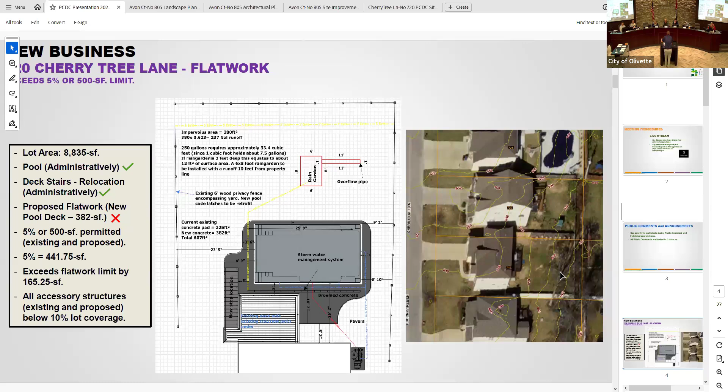Jack, are there any known water related issues on this property or the surrounding area? My understanding is it kind of falls - if we look at the photo on the screen, and also on page 3 of the report, it shows the contours there, and that shows it gradually slopes west to east. And then there's kind of this little ravine, or I don't want to call it a ditch, but drainage.

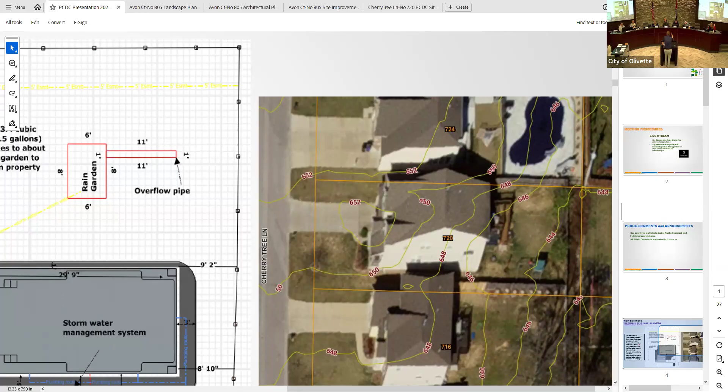That kind of goes right down in between those two properties, between Cherry Tree and the street located to the east between those properties. That falls - if we had the bigger picture of the contour, you can see how it gradually goes down following the natural grading. So not that I know of. I don't know, Carlos, have you? Okay. Sweet, thank you.

This is an area that developed right away, right before 2008, before the city had on-site stormwater detention requirements for those lots. So we experienced quite a bit of increase in stormwater because of the new homes and driveways there, and as people settled in, improvements went in place.

The way it's set up is that there's a piping system along Cherry Tree and Harvest that releases the front yards down by the creek that runs in the St. Louis County right-of-way and the bike trail. That's been the natural flow of drainage, with the rear properties all draining right along that middle area.

You can see how the fences are kind of all separated apart, and the drainage just flows all the way through in there. Some days it's stagnant when it's light and low, but for heavy rains, that's the direction most of that drainage goes, heading down towards the bike trail and then into the stream that runs east-west towards University City.

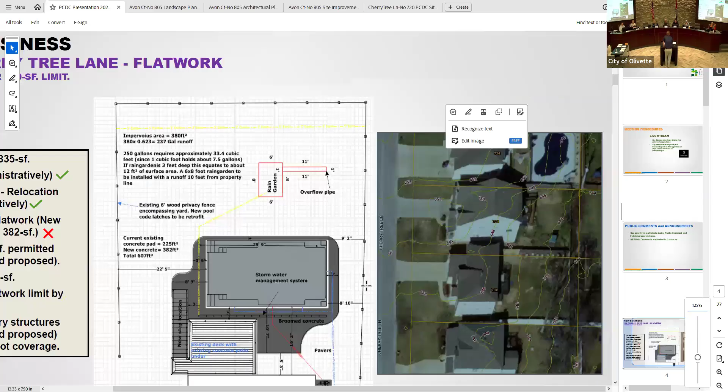Anybody else have any questions or comments for Jack? I'd also like to note that the notifications were mailed out and we've gotten no concerns back from any of the surrounding neighbors. And to reiterate with the accessory structures, there's a portion of code that gets checked with the 10% lot coverage. They are below that threshold, so they don't exceed the 10% of existing and proposed on their lot, but they do exceed the 5% flat work.

Appreciate the clarification. And the homeowner is here tonight if there are any additional questions. If you'd like to come up—do we need the homeowner to come up? Does anybody have any questions or comments for the homeowner? Seeing none, do I hear a petition?

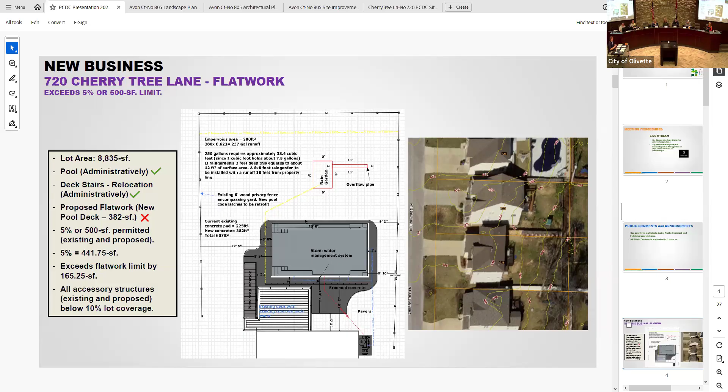I'll make a motion. Go ahead, Sam. Motion to authorize approval of the petition for site plan and community design review for a total of 382 square feet of new rear yard flat work at 720 Cherry Tree Lane, as presented in the memorandum from the Department of Community Development dated December 18th, 2025, subject to any staff conditions noted therein.

Motion's been made by Sam Wallach. Do I hear a second? Second, seconded by Laura Ragsdale. Carlos, please call the vote. Commissioner Spiegelglass, approved. Commissioner Ragsdale, approved. Commissioner Wallach, approved. Chairman Jorgel, approved. The motion is approved unanimously.

So the next step is completing the building permit process to get the necessary permits. Jack will coordinate that with you. Thank you, thank you.

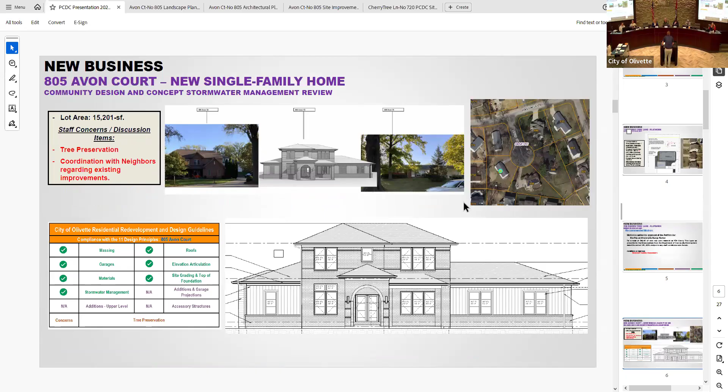Okay, we'll move on to item B, 805 Avon Court. Jack? Good evening again, Commission. So before you tonight is 805 Avon Court. It's a new single-family home that's only subject to community design and concept stormwater management review due to the sizing of the lot. The main concerns from staff came up with tree preservation and coordination with the neighbors regarding existing improvements.

If we go to this graphic, you can see it depicts the other properties that are around or within the same cul-de-sac. There are two homes that are relatively new, one built in 2009 and one built in 2007. 800 Avon is the farthest to the south, and then I don't know, I can't read that number.

808 Avon is also one of the newer builds. You can see that 809, and then 804, are the ones that are older, the one-stories, but they also provide the residential square footage there.

If Carlos, you could go back - there were no concerns with the stormwater. That's just a graphic depicting the location of the PVCs, the metering outflows, and the detention facility that will be located to the south within the rear of the lot.

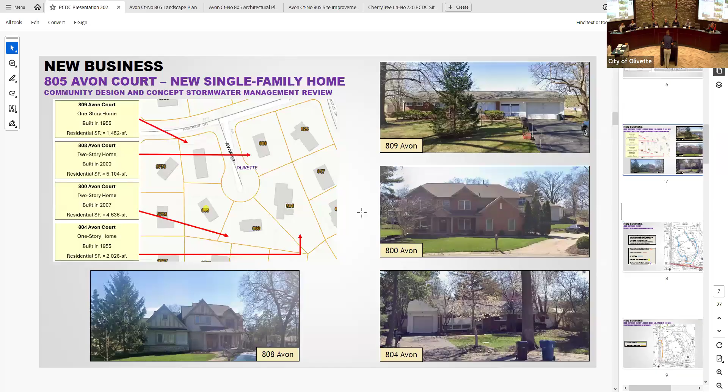Carlos, if you could go to the next slide. This is one of the concerns that stuck out to staff, the location of the neighboring improvements. The site plan depicted a 48-inch chain link fence to the north that comes off the property to the north and extends onto 805 Avon's property, as well as a garden area noted there. We're seeking clarification on whether that garden area is part of 805 or if that's something the neighbor on the lot to the west extended onto 805's property.

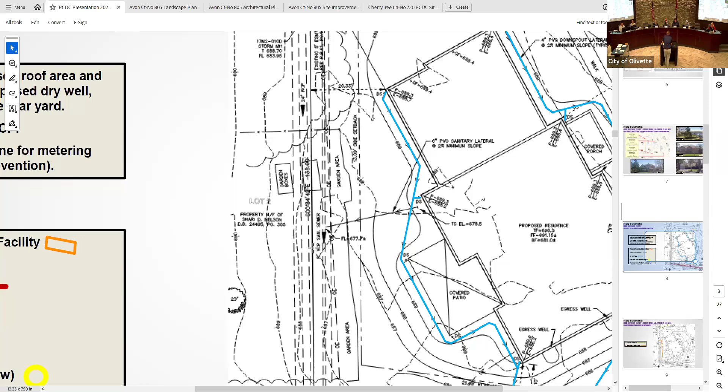So we're seeking for the petitioner to coordinate with those neighbors to have those improvements addressed. In the conditions of approval, since it's a lot that's being remodeled and renovated as a tear-down build, it's going to be something that as our condition of approval, those on-site improvements would be required to be removed.

The other concern that stuck out was tree preservation. There is just one tree deemed on the lot and it's deemed in good condition, located in the northwest of the property. We're seeking additional information on the tree protection measures.

It's planned to be protected. However, we want the petitioner to go back and make sure that everything submitted for the building permit is in accordance with ordinance 2821, to make sure the construction fencing differentiates from the tree protection fencing, and that the correct distancing is applied from the plans, making sure what's shown on the demo plan matches what's shown on the site plan and landscape or tree replacement protection plan.

We just got an additional landscape plan, and that plan depicts 2 replacement trees, though there's more than 2 shown, with 2 of them deemed native trees. For a lot between 15,000 and 20,000 square feet, 6 replacement trees would be required. He's protecting 1, providing 2. We would like to see that plan updated to reflect the 3 additional trees that are supposed to be indicated under the ordinance.

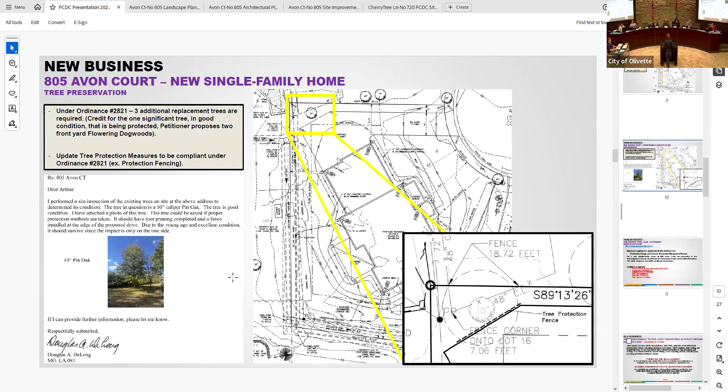All right, great. Does anybody have any questions or comments for the representative? Seeing none, thank you. I appreciate it, thank you.

All right, any other further discussion? I'm sorry, did we want to talk about the garden or anything like that? We can, yeah. Have you talked to the neighbors about the garden or anything?

No, okay. I will obviously talk to her and do whatever it takes to cooperate with her, like maybe move it. I want a happy neighbor, I don't want any conflict. So what's going to happen with that chain link fence?

It's gonna be gone. I want to put the new one in. Good, good, good, fantastic. I mean, the whole property is kind of running down.

Is that good, Tim? Yeah, I think as long as they have that discussion and you guys are okay with it, I'm good with it. And ultimately I think they need to get that clarified. It would be an imposition to have a new owner face their neighbor over this, so I think we want to get that resolved before the permit's issued. Sure, all right, great. Thank you.

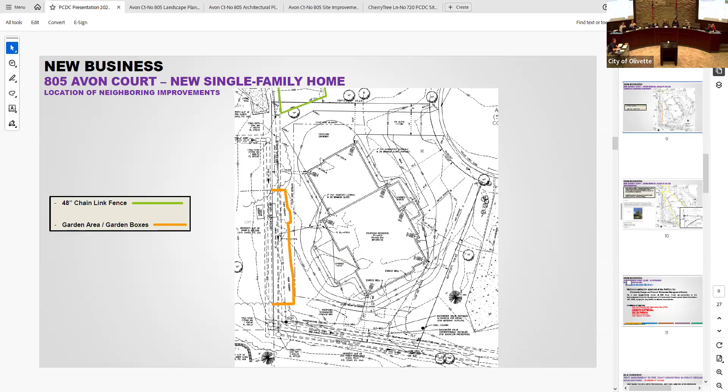All right, if there's no further discussion, do I hear a motion? I'll make a motion. Somebody put it up on the screen so I can see it. I'm gonna have to show you where, I know it's in here somewhere.

Motion to authorize approval of the petition for community design and concept stormwater management review for a new single-family home at 805 Avon Court, as presented in the memorandum from the Department of Community Development dated December 18th, 2025, subject to any staff conditions noted therein.

Motion's been made by Sam Wallach. Do I hear a second? Second, and seconded by Laura Ragsdale. Carlos, will you please call the vote? Commissioner Spiegelglass, approve. Commissioner Ragsdale, approved. Commissioner Wallach, approved. And Chairman Drigo, approved. The motion passes unanimously.

So the next step would be for submitting for building permits. All right, thank you, appreciate it. Okay, let's look at the agenda. We're gonna move on to old business, item A, text amendment to the LID Light Industrial District regarding data centers.

Chairman, this is a draft based on our discussions from our last meeting. I'm not asking for any action tonight, but I think we have everything addressed. Right now there are no data centers that have been requested or proposed here. We're just trying to be a little proactive. A lot of our neighbors have amended their codes to require them as special permits, which means a higher level of review. Right now, a data center, the way our zoning classification is defined, would be permitted by right.

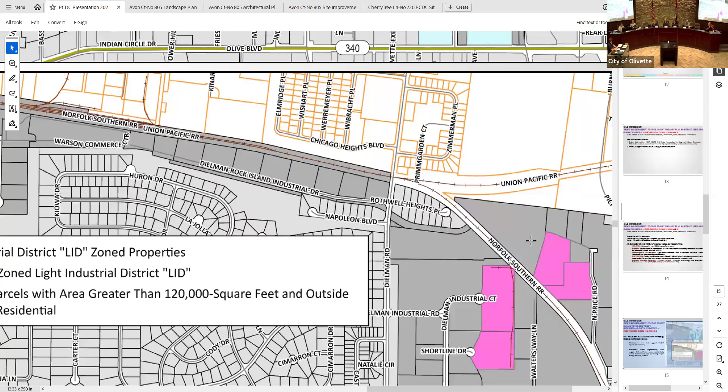It's good to also look at what is there - Murphy has their administrative offices located here, and they do fabrication on this side, and they own this building. Murphy's been pretty active with these three parcels, and we hope they continue to be residents here for a long time.

This facility down at Shortline, Schnucks operates all their floral operations there. They're a great business for us, but it's not anything unique of a building. We're fortunate that they selected that location - it's probably great for them because it's pretty well centralized.

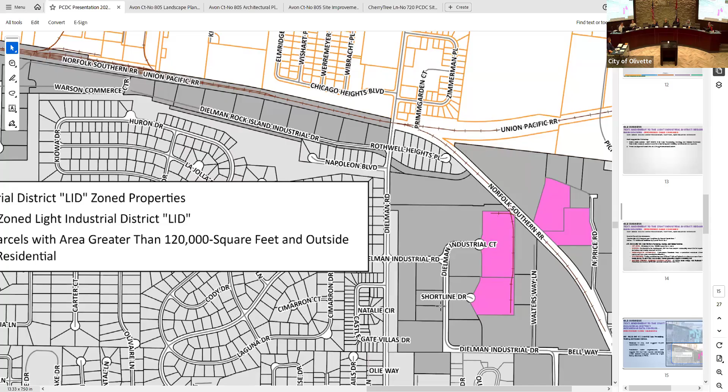This facility is currently occupied, but a lot of times it seems very low intensity. It used to be the old printing operations for Gannett, which did USA Today. If there was anyone I would be suspicious of, it's this one, because it's an older single story kind of warehouse, minimal office type of facility.

I mean, are we trying not to have data centers? I think we just want to control - that's not our goal, the underlying goal, but to make sure we have regulations where we can manage where they can be, and those 4 sites would be the ideal sites, and control the impact. But if those 4 sites aren't available and somebody wants to come in here, are we saying that's a no-brainer?

Ultimately, if you look at these sites, the only site that's available that isn't occupied at this moment is this vacant piece of land here off of Dielman. We've been very fortunate - our industrial parks do pretty good in terms of their occupancy. We've got spaces here and there, but most of the larger buildings are pretty well occupied.

Have you been involved with any construction of data centers or anything? I haven't heard of it. The only thing I marked down that I was gonna ask about was pollution - is there any concern about pollution with any of these things, like water cooled or anything like that?

And I think that's where we would want the consultant to talk about water. Water, okay. Yeah, yes.

I haven't seen anything, but I know it's coming and it's coming very fast, and they're gonna be looking for places. Exactly - that's kind of the whole purpose, to get this in play.